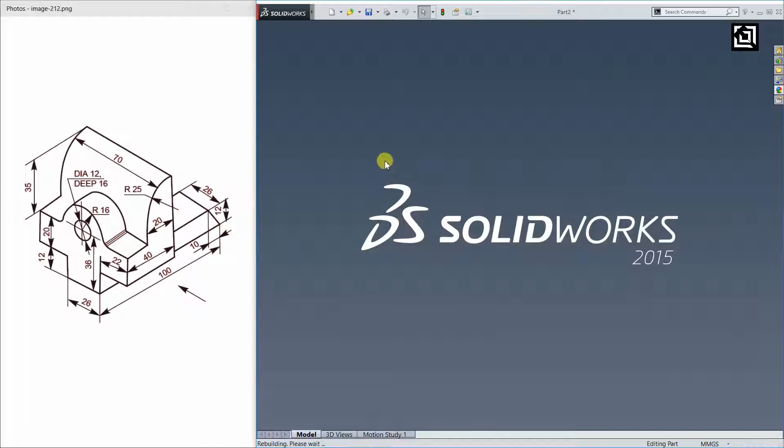Let's start with a new part model in SolidWorks 2015. Since it is in right plane, I'm taking the right plane as normal, and for your information, I'm taking the center of this line as origin.

Now I'm taking the line command, and here we have a length of 13. From here to here they have given 12, from here to here 22, and this they have given as 20 mm. So I'm starting from here towards right as told, 13, and height of 12 mm, then towards right 22 mm, and upward 20 mm.

This direction length hasn't been given directly, so I'm going from here directly to the center of the circle we have here. From here, I'm drawing an outer circle of radius 16 mm, and the remaining length should be the length of this line that we have here.

I'm drawing a circle of radius 16 mm, which is 32 mm diameter. To make it symmetrical, I'm drawing this line and trimming off the unwanted part, and now mirroring the whole part with respect to this line, so we could get the whole section.

Here we can notice they have given a fillet here, but they haven't given the dimension exactly, so we should assume either we give the fillet in the 2D diagram and convert it to 3D, or we draw the section, convert to 3D, and after converting give the fillet command with this command we have here.

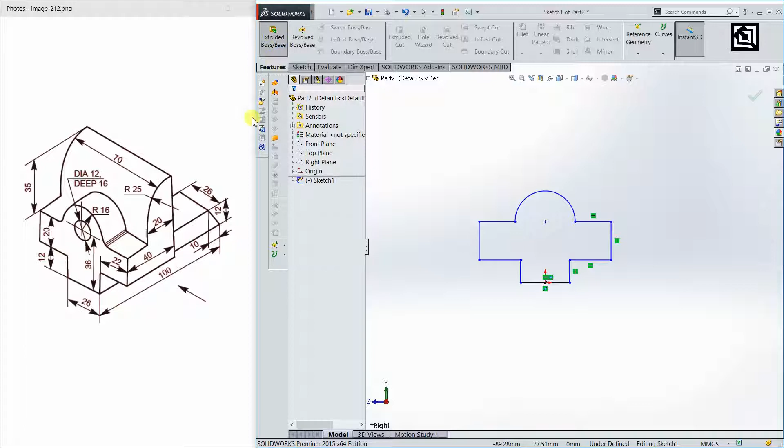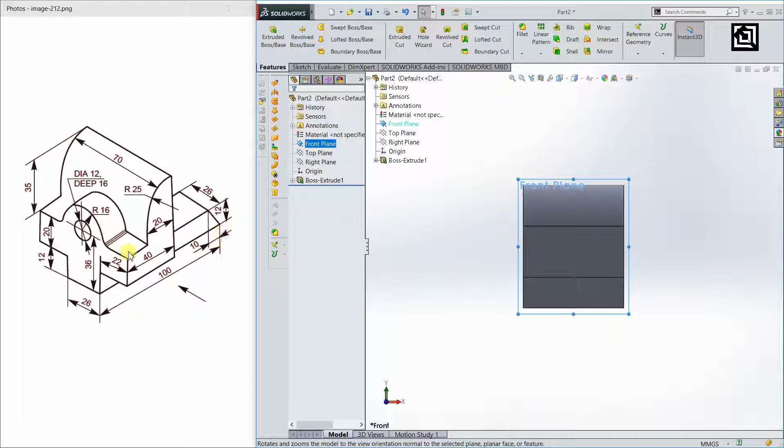We are done with the first part, and now from the front plane I'm going to draw this section. I'm taking the front plane as normal, and since they have given an overall length from here to here of 35, I'm starting this section from this point. From here to here they have given 35 mm, so I'm going upward 35 mm.

They have given it as made of a fillet of radius 25, so we are not doing that in the 2D diagram. We are considering this section as a whole rectangle of length 20 mm and height 35 mm. I'm drawing a rectangle of height 35 mm and length 20 mm, and extruding that to a length of 70 mm, which is given directly.

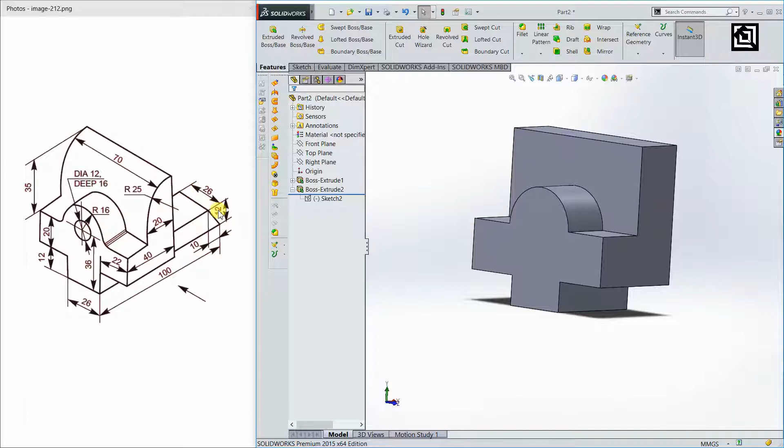Since it's symmetric to the front plane, I'm giving the option mid plane. We are done with the second part, and the fillet part of this and this we will give at the end. Now we have our third part to be done, which is again in the front plane.

I'm taking the front plane as normal, and drawing from, I'm taking the corner rectangle, and the overall length given from this point to here is 100, and we have already gone through a length of 40 mm, so I'm starting from here. Height they have given us 12, and length they have given us 100 minus 40, which is 60.

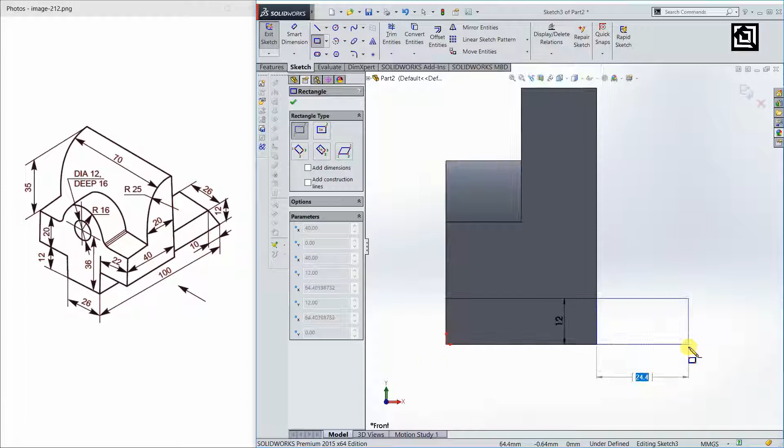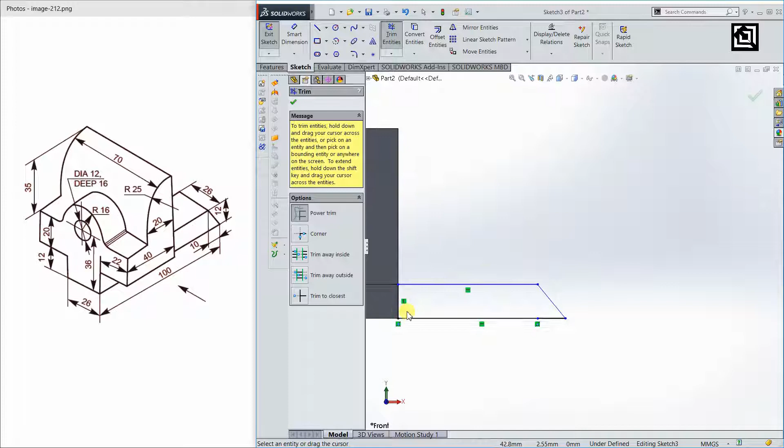So, 12 and a length of 60 mm. Here we have an inclination after a length of 10 mm, so I'm going from this point towards left 10 mm, joining diagonally, and trimming off the unwanted part that we have here. We are done with the 2D diagram of the third part.

Again, the extrude with respect to mid plane, so a length of 26, and the section will be this one.

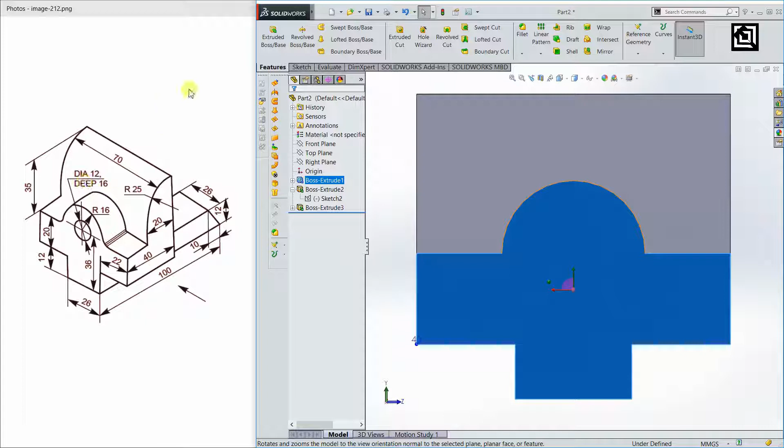We are done with the third part, and the final part that we have here is the extrude cut of the circle of diameter 12 mm. I'm taking a circle, diameter 12 mm, and extruded cut to a depth of 16 mm.

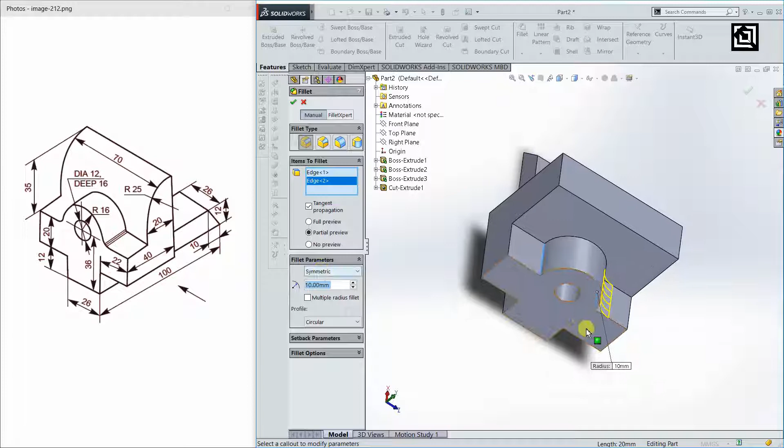So we are done. The final part that we have is the fillet to make here and this section, and the final fillet here. I'm starting with the fillet here now. It's automatically driven as 10, since it seems much bigger than the one given here, so I'm shrinking it to 5, which should be okay.

And the final fillet that we have here at a radius of 25 mm, clicking this one, and 25. Yeah, we are there now.

And yes, we are done with today's 3D part model. Hope you all enjoyed it.